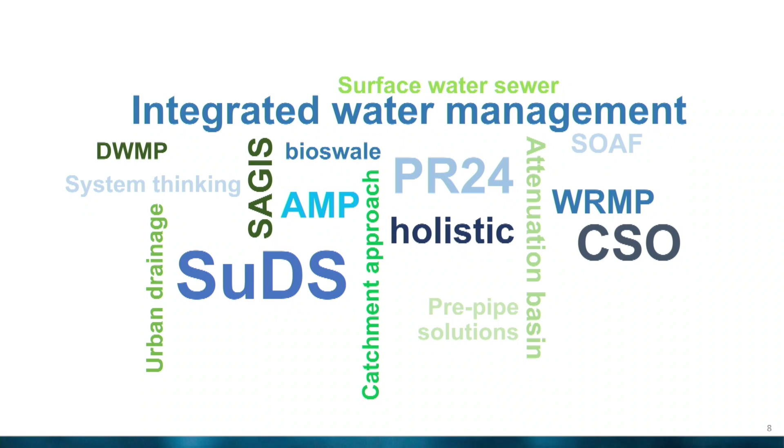So my job is to stir you up and to wind you up. And I'm going to talk to you about 3 problems and 2 ways in which you and all of you can solve these problems. First problem is our climate is changing rapidly. The second problem is we're trying to tackle that problem by looking in the wrong places for the solutions. And the third problem is no one's got a clue what we're talking about.

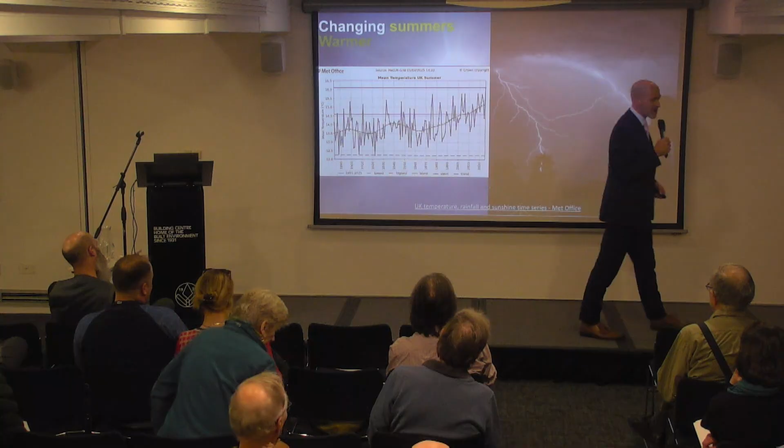Let's get into the detail. Temperature on the left, rainfall on the right. Our temperature is getting warmer, and the consequence of warmer temperatures is more water overall. This is our summer metric for increase in temperature.

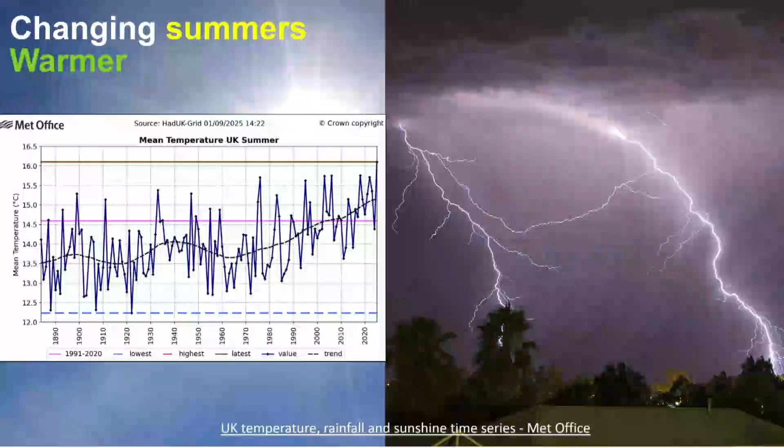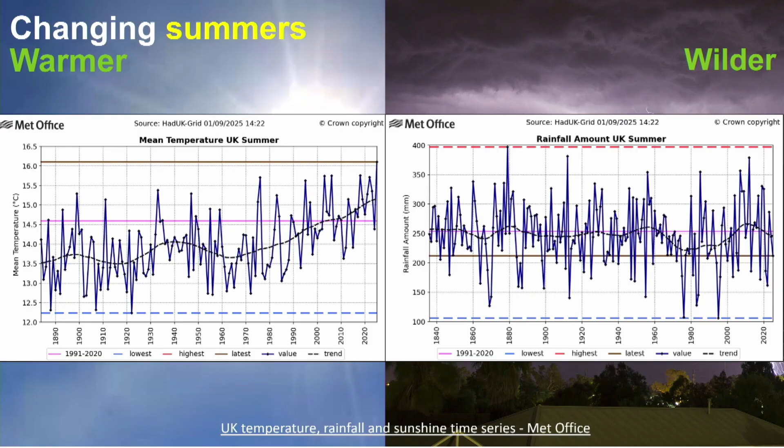Now in the summer, we're not seeing in total more rainfall. What we're seeing is wilder rainfall. Actual levels of rainfall, if measured over the whole of the summer, hide the big thunderstorms that are causing the numbers in there. So we're getting warmer and wilder summers.

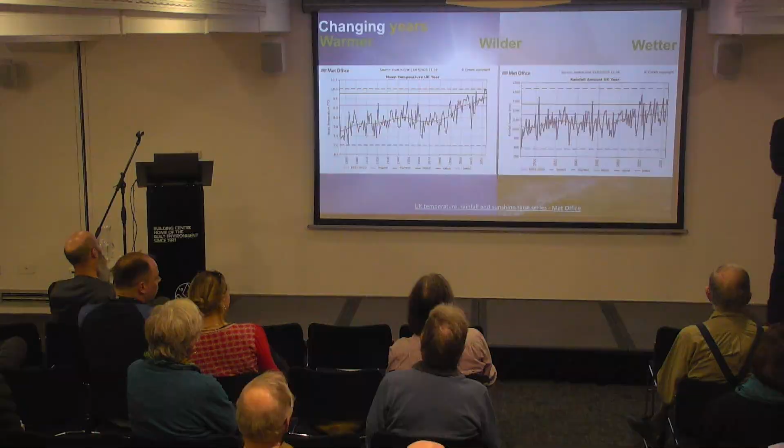If you look at the winters, they're warmer and wetter. And if you take those summer, spring, winter and autumn numbers together and look at the whole year, you're getting warmer years and more rainfall. This is called the Clausius-Clapeyron relationship, a very simple law of thermodynamics: the warmer the atmosphere, the more moisture it holds. That is exactly what we are seeing.

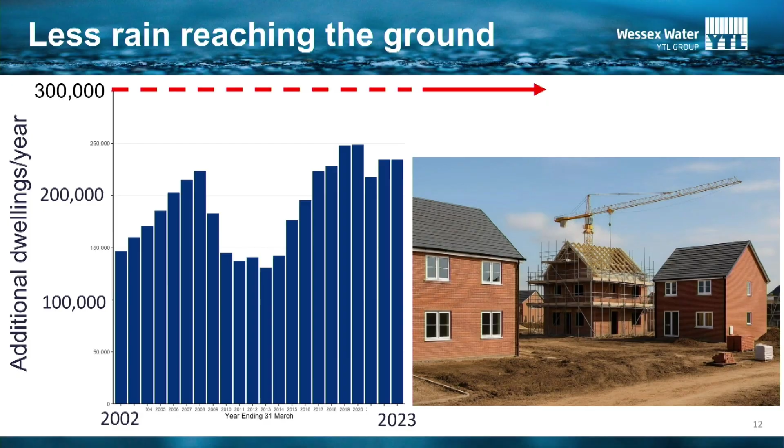We're adding to the problem because when we build properties, we build in impermeable area. Who wants to live in a house with a permeable roof? No one. Historically we've been building at about that rate, and going forwards we've got to build at a faster rate to meet 1.5 million new homes. Anyone want to bet if we're going to get there? No, we're not. But less rain reaching the ground is going to exacerbate the problems.

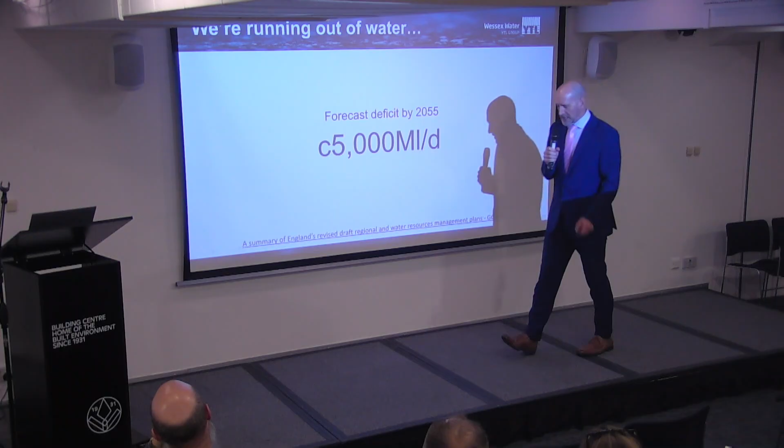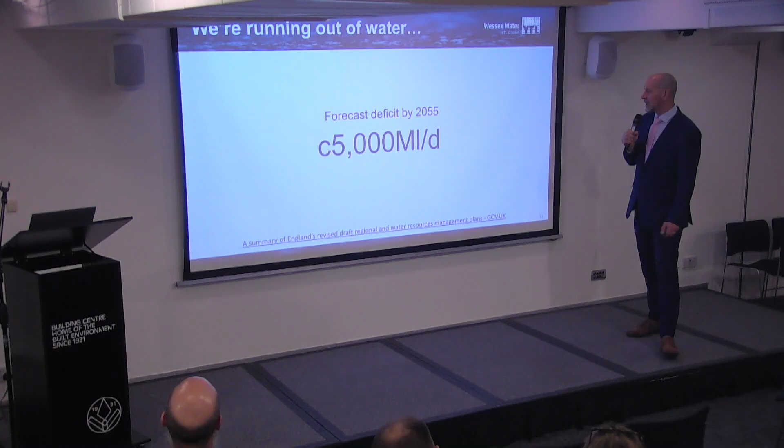Here's the weird thing: we're running out of water, apparently. According to our water resources management planning, by 2055 we'll be about 5,000 megalitres a day short. How much do we currently put into water supply? About 12,500 megalitres a day. Why is it short? Well, we're getting these longer, drier summers, abstraction licenses are being cut to protect the environment, and demand is going up.

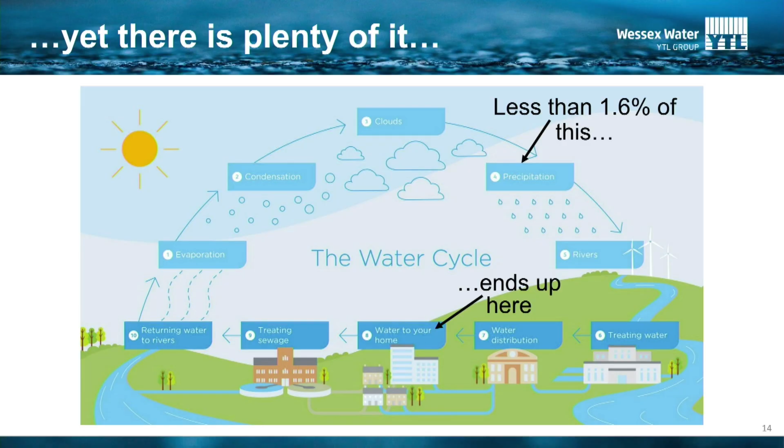So that's a bit weird, because the UK is actually quite wet overall. We give our customers about 1.6% of the rain that lands on our country. So we're running out of water, yet we're only using a tiny, tiny fraction of it. There's something not right here.

I'm going to tell you some really crazy stats now. You've probably never heard of a teralitre. A teralitre is 1 trillion litres, that's 1 trillion kilograms, that is 1 cubic kilometre of water. Try and get your head around a cubic kilometre of water. In 2024-2025, water companies provided 4.6 cubic kilometres of water to their customers.

That's a lot of water. But that water hasn't just rolled to the customers, it's been pumped to them, to the extent where we have had to pump it, on average, 100 metres in the air to get to our customers. Now, 100 metres times 1 trillion kilograms, you're not going to be able to get your head around what that number means, so I'm going to bring it back down to you as an individual. Every day, the amount of energy we have to put into getting water to your tap is the equivalent of you lifting a bag of sugar, 1 kilogram weight, twice the height of Mount Everest.

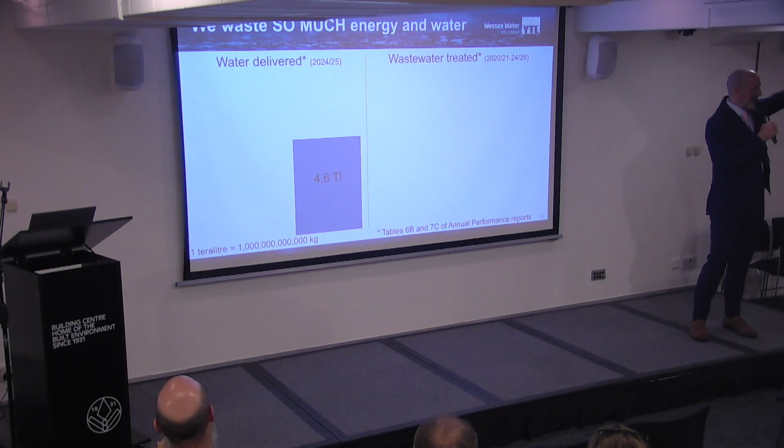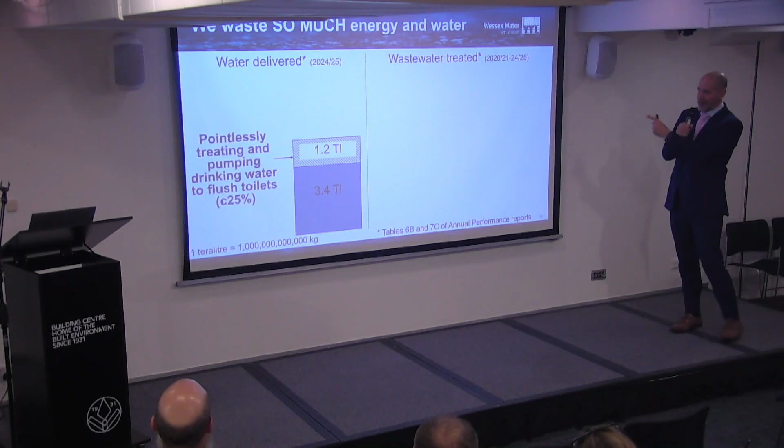That is how much energy your water company puts in for every single person every single day, getting 1 kilogram 18,000 metres in the air, so that you can spend a quarter of it filling your toilet cistern. That is totally stupid, and it's not your fault, that is the way your house is built. And if you think that's crazy, 1.2 cubic kilometres of drinking water is lifted 100 metres in the air so you can flush your poo with it. If you think that is crazy, it gets worse.

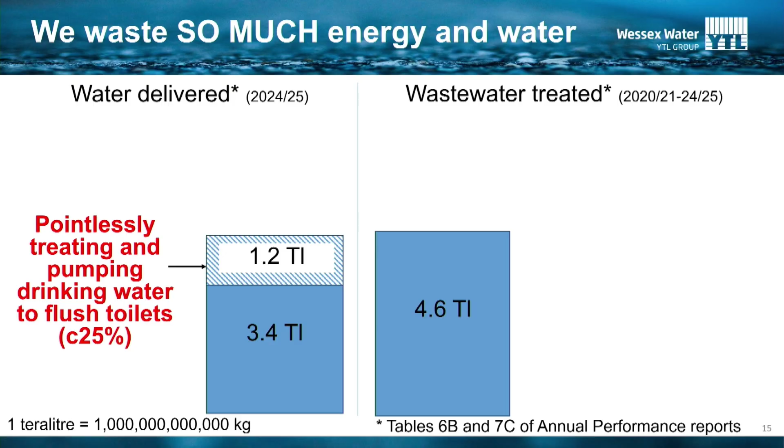That total 4.6 teralitres of water comes back to us for treatment because you guys have polluted it. But that's not all that comes back to us, because you're adding rain, thanks very much. So our wastewater treatment works are treating between 50 and 80% more liquid than we are giving our customers. And we know, actually, what is given to us is a lot more than that. Hence we have the problem with storm overflows.

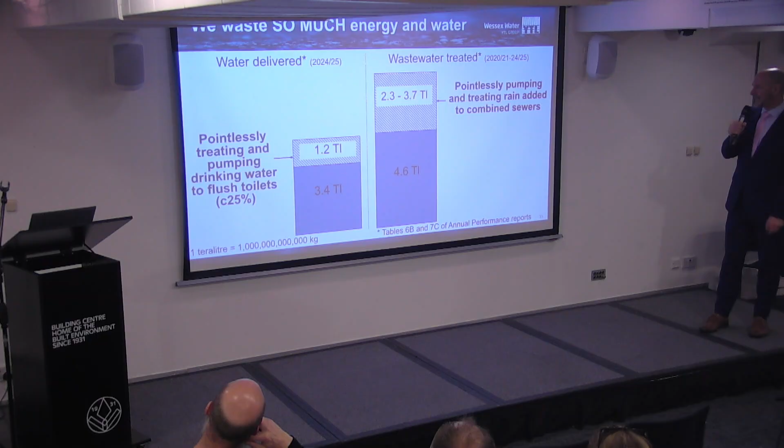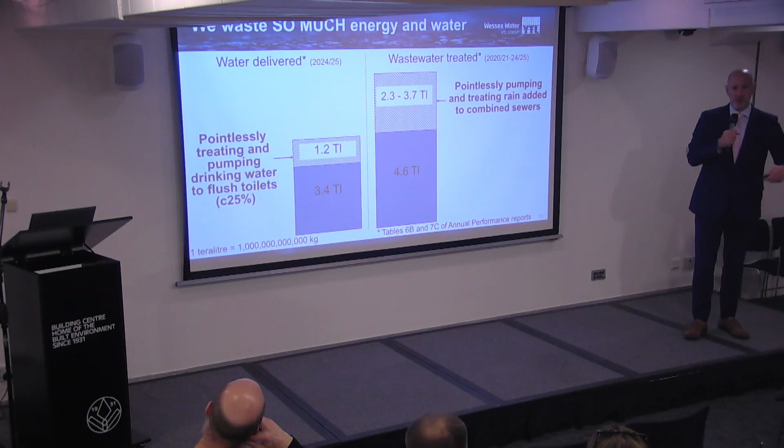Well, that's needless, that's pointless. And the energy that has to go into that is colossal, because not only do we have to lift sewage multiple times, but also we have to treat it, and that requires energy and chemicals. A lot of our chemicals are driven by volume, so if it's a coagulant like ferric sulfate, the more liquid that arrives, because we are treating all this rain, the more chemicals we have to pour in.

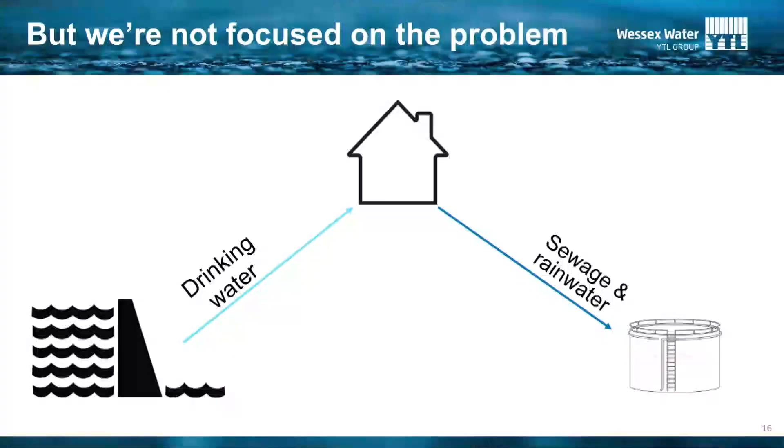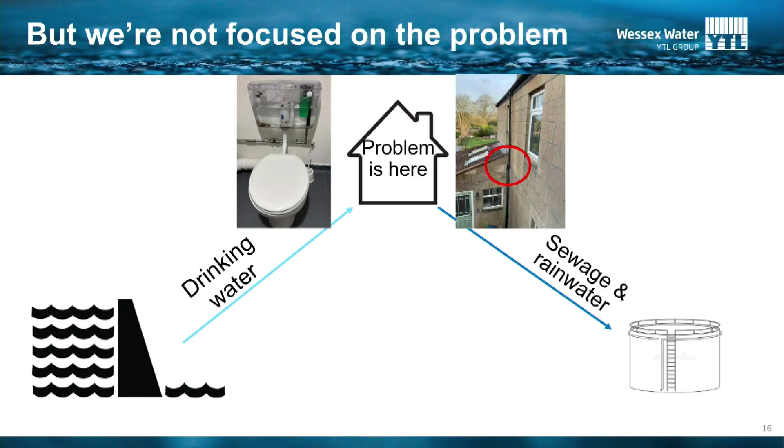We're not focused on the problem, because the problem is here: our homes. We are in the Building Centre. This is what we talk about - we talk about homes. The problem is we're filling toilets with drinking water, and our toilets are connected to our downpipes. About half of the properties in England are built like this.

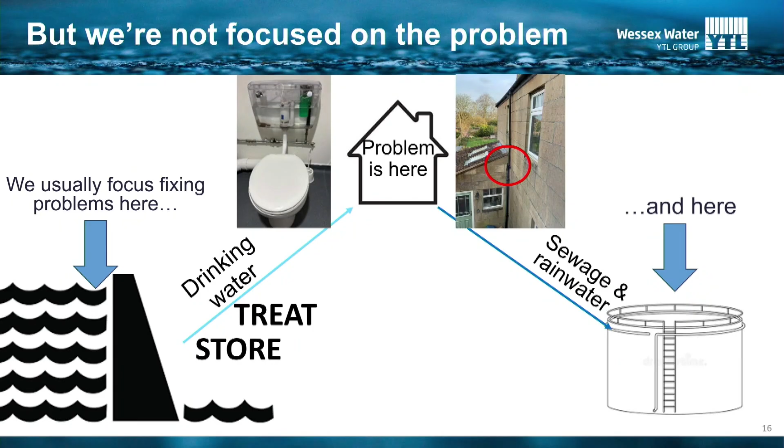How do we tackle this problem? We try and fix it by building bigger reservoirs and bigger storage tanks for stormwater. All that means is we end up storing, treating, and pumping more drinking water so we can fill our toilet systems, and then storing, pumping, and treating more rainwater so we can discharge it back to the environment because it's been contaminated with sewage.

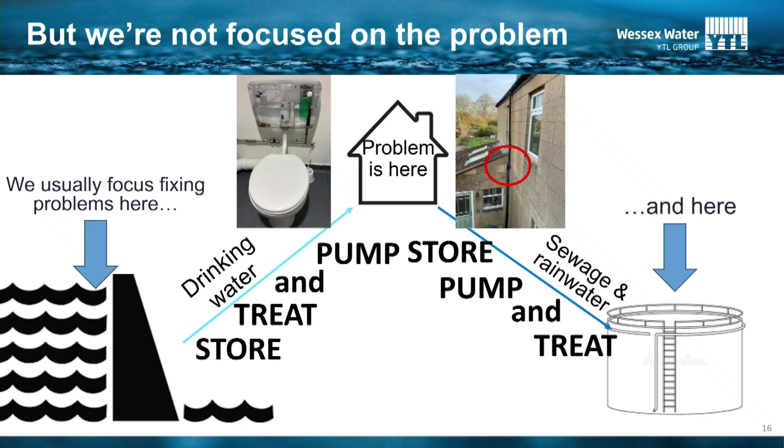We're not focused on the problem. We're stuck in this doom loop of a rapidly changing climate where we're adding more impermeable areas, and the centralized solutions we're building have a very high carbon footprint, which is leading to a rapidly changing climate.

This is miserable, isn't it? I'm sorry to depress you. There will be good news, don't worry.

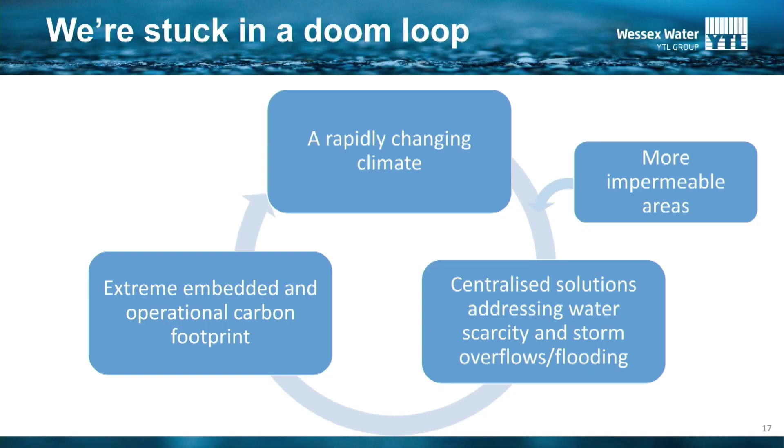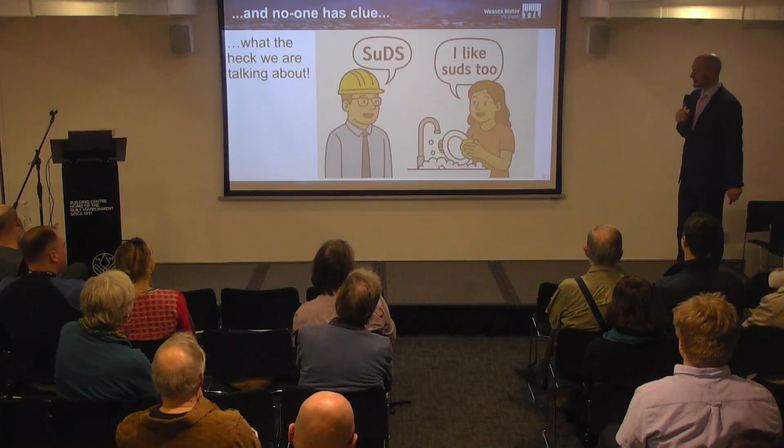My third point was, no one's got a clue what we're talking about. The number of times I speak to people about what I do, and I use water company industry terminology, and they look through you because they don't know what you're talking about.

How do we tackle all three of these issues - a changing climate, people that don't know what we're talking about, and a lack of focus?

Well, here it is, 6 words. This is the peak of my talk, okay? These next 6 words are the peak, because this is what I want you to go home with. How do we do it? It's very, very simple, overly simple, but it's this.

We need to manage rain better where it lands. Right, let's talk about that.

What does that mean? Managing rain better where it lands is basically about following simple source control principles. We all understand what source control principles are, and they are very simple.

Rain's a resource, no whatever Sherlock. We should be capturing it locally and using it where possible - not reusing it, because no one's used it first. We talk about rainwater reuse - no, it's rainwater use, because it's not being used in the first place. And then we should be returning it back to the environment as close as possible to where it landed.

Sounds obvious, and we're going to talk about SuDS in a second. Sometimes we get that wrong.

Let's apply this to what drives me mad, which is storm overflows, and we can solve storm overflows in 4 different areas. I'm going to show you how we currently solve storm overflows and how we could solve them, going from bad to better.

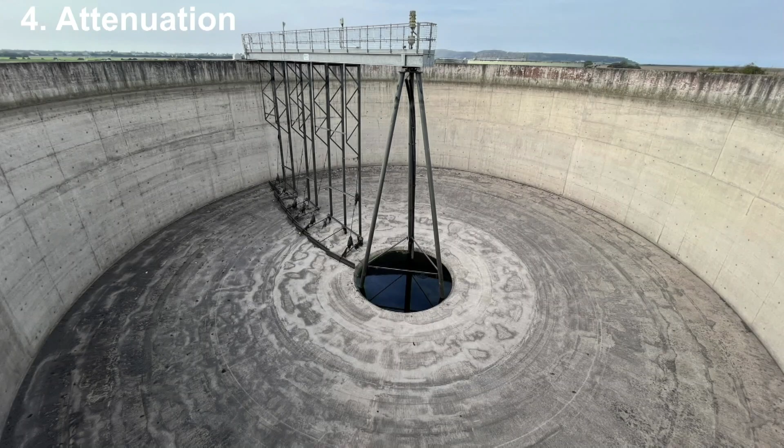We're going to start with number 4, attenuation. Attenuation has high embodied carbon, high operational carbon, because of all the pumping and extra chemicals. Often there isn't space to build this kind of stuff in cities. No biodiversity benefits, it doesn't help with our water resources, and customers' bills go up. Not a great solution, but it's what we're doing.

Increasing flow to full treatment - this is our largest works at Wessex Water, Avonmouth. Currently treats 3.5 tonnes a second. If we were just treating sewage, we'd be treating 1.3 tonnes a second, because there's only 850,000 people upstream of here. But we're treating 3.5.

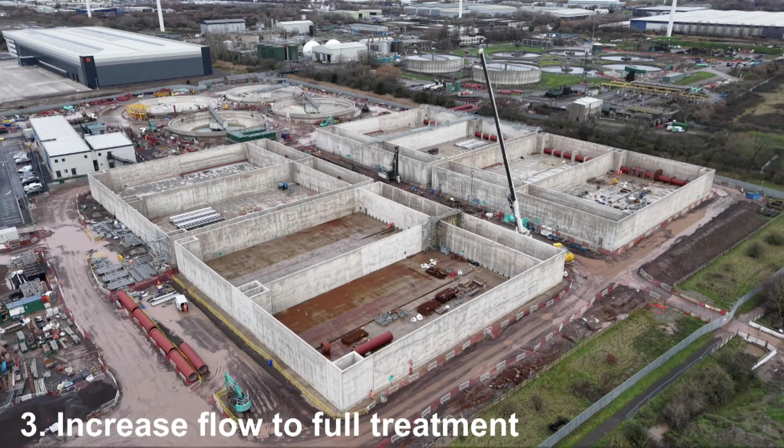That's not enough - we're adding an extra 2 tons a second. This will enable us to treat 5.5 tons a second. If that was sewage, Bristol would be the same size as London. It's not - why? We're treating more rain. How stupid is that? So that's not a good solution either. Lots of concrete, lots of chemicals, lots of energy, no value-added benefits.

Storm overflows, intermittent discharges - well, how about treating the discharges? If you're worried about public health, you can go and zap those bacteria. Lots of energy, no environmental benefit. That is one option, not a great option - lots of carbon, lots of energy, and it doesn't really tackle the whole environmental problem, if you think there is one.

Reed beds, constructed wetlands, etc., are great, especially where the overflow is incredibly dilute, as it is in groundwater, high groundwater table areas like a lot of Wessex. This is one of our treatment works called Wheeldon.

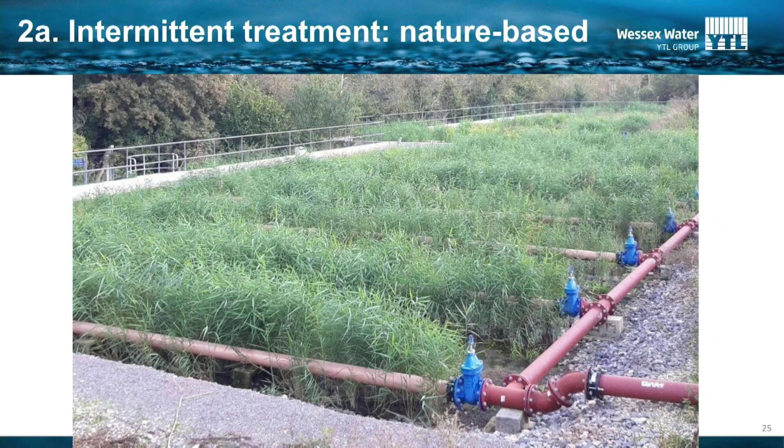In 2023, it discharged for 70% of the year, and what was coming out was cleaner than the treated sewage was required to be. That's how dilute it is.

But there's a big problem with SuDS, and it's a big problem everyone is now talking about: ownership, operation, maintenance. There are 2 consultations out at the moment from both DEFRA and MHCLG about how we tackle the whole problem of maintenance of SuDS and who maintains them.

But what this is lacking is the fact that rain is first and foremost a resource. And whilst it is being used for the biodiversity benefits, the people contributing to it are not benefiting from that resource side of rain. So I want to come to property level SuDS, where we see the rain that lands on our roof

as a resource that we can reuse. Now, that might only be garden reuse because internal plumbing is pretty expensive, but you could easily do that for new build, and then getting rid of the surplus into your gardens.

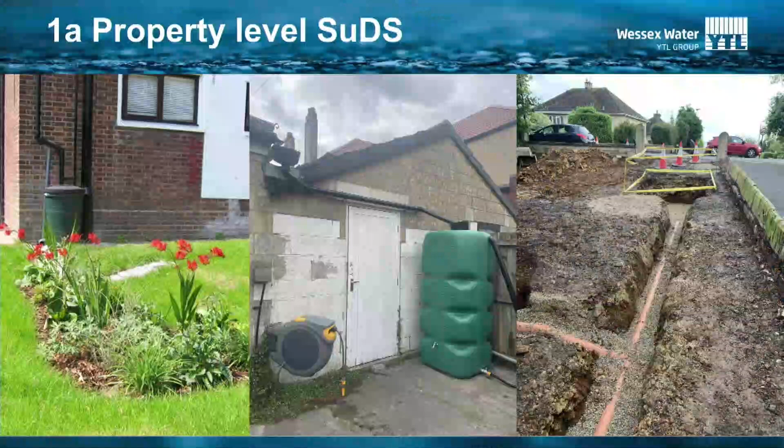The 2 right-hand pictures are my home. Yes, it's a bit of a mess, sorry, this is work in progress. There's a cubic meter capture there. And what's really important with a water butt is what happens when it is full. You can see here the overflow to my water butt, which just goes around the garden.

There's nothing underground, it literally goes into my petunias. The front of the house, I've just redone the driveway and put it straight into a soakaway, so there's no sudsy kind of biodiversity or other benefits from that, but at least it's not going into the combined sewer that runs around the back of my house anymore.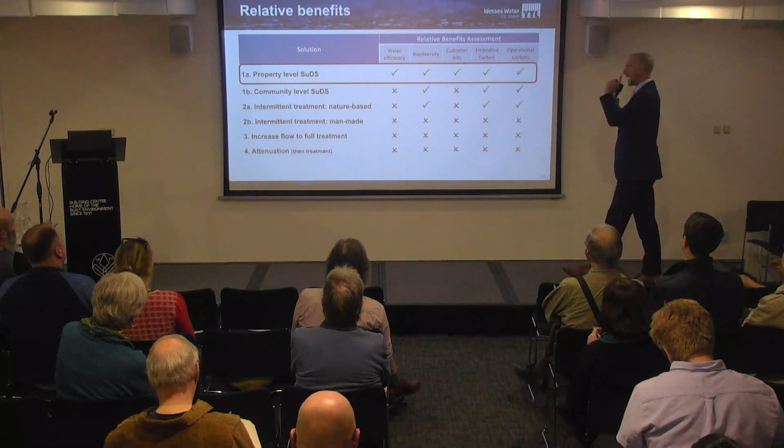So when you compare these options, property level SuDS stand head and shoulders above others. Communal level SuDS and nature-based treatment solutions are good, but they're not at the top of the tree.

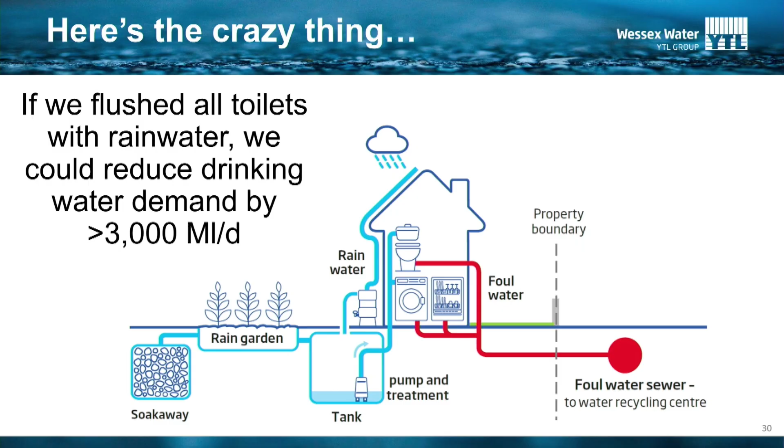Here's a crazy thing. If we flushed all of our toilets in the whole of the nation with rainwater, we could reduce drinking water consumption by about 3,000 megalitres a day. Compare that to the 5,000 megalitres a day that we reckon we're going to be short of. Now, obviously, retrofitting every property like that is a tall order, but let's start with things that aren't built yet.

I'm going to finish with 2 things that we can all do. These are really simple things, and I'd like you all to try and commit to do these. One, let's use a common narrative. It's a narrative that is catching. Other people are saying it.

If we all say it, as people who are involved in water management, managing rain better where it lands, or managing rain better where it falls, it's kind of the same thing, we will make progress. We are making progress.

This is the Water Minister a month ago talking about it. After this meeting, I'm going to the City Water debate. The chair of the EA, Alan Lovell, phoned up my chief exec, Ruth Jarratt, 2 days ago, and he said, I've been listening to this Matt Wheeldon guy, I want to talk tonight about rainwater management.

Ruth Jarratt, my chief exec, said, no, I'm talking about rainwater management tonight. I said, why don't both of you talk about rainwater management tonight? So it's getting through, it's a message that's getting through to the top now.

What do we mean by rainwater management? We mean recognizing it's a resource and then getting rid of the surplus locally. So that's the first thing, common narrative.

The second thing I'm going to leave you with is campaigning for source control principles. These are the 2 principles we've already mentioned. So what are these? What could we do? Well, here's a long list.

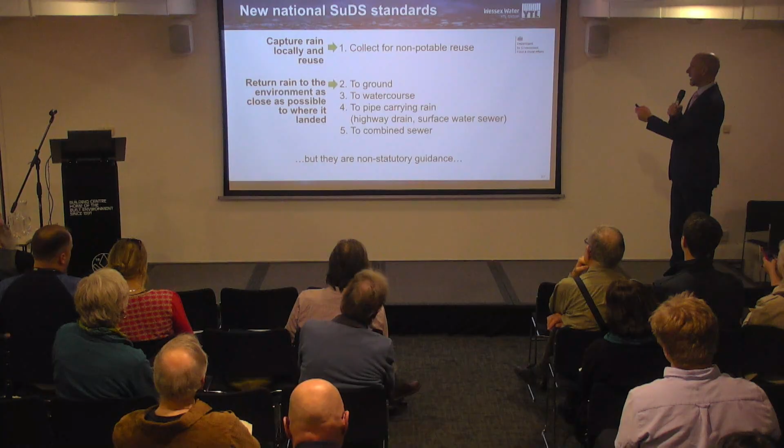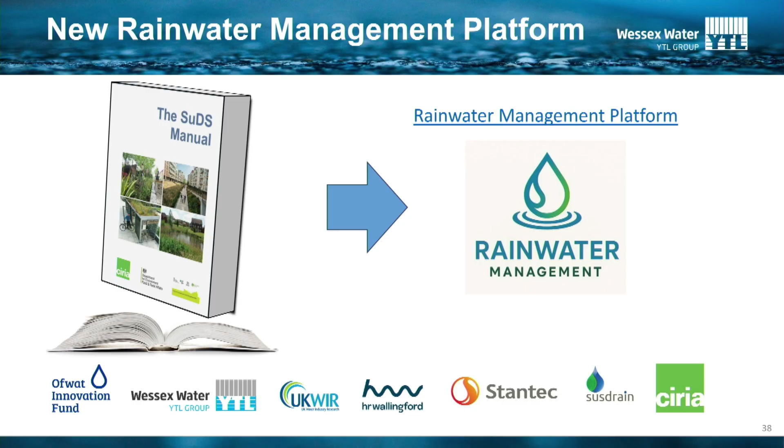Rainwater Management Platform - I'm speaking more about this next Tuesday, but very briefly, it's taking the Bible of drainage and converting it into something modern, new, free to access, and also emphasizing the need to use rain as a resource. That's work we're doing with a whole number of organizations. It's a £2 million Ofwat innovation-funded project. It's very exciting, and I'm leading that as a lead sponsor, so that's really great.

This is very exciting as well. So here's the big exam question: what is the evidence that managing rain better where it lands, for both new and retrofitting development, is better economically for society and the environment than centralized solutions? Lots of work has been done in this space under Enabling Water Smart Communities and various other projects. This is trying to bring it all together into a really simple message that gives DEFRA and MHCLG the evidence they need to focus on decentralized solutions and make it happen.

And then something coming up in October - we're gathering the world's greats in rainwater management, and hopefully the UK can go and learn some lessons from people who are well ahead of us on their journey of their relationship with rain.

Right, my last slide I always leave to Janet and John because this is such a simple message. So Janet and John summarize everything I say, really, really simple. Here's Janet and John on rainwater management: 'My goodness me, John, we've sorted water scarcity and storm overflows and reduced our carbon footprint.' 'Ah, Janet, that's because you and me have become so much better at managing rain where it lands.' Thank you very much.

Is it possible to switch the front lights off? Why not? It's nicer images.

I'm Kevin Barton, Managing Director of Robert Bray Associates. We're a firm of landscape architects that have been specialising in managing rain in the landscapes we design the other way, since the mid-90s, since the whole SuDS thing came across from the US.

We're in a bit of a desperate state. This has been around since the mid-90s, but arguably we've gone backwards quite a long way from when the idea came to the UK. I'm going to show a few examples of bad SuDS, some of the sort of stuff that Matt showed, and then I'm going to do a couple of case studies of housing schemes that use a more integrated, water-sensitive, spongy approach to managing rainwater in development.

It requires a really fundamental mind shift, and we don't like what we call the D word. As Matt said, it's not great to talk to the public and include the word drainage - it puts people off, it puts other disciplines off. I remember in the mid-90s, I was really put off with the idea of sustainable urban drainage systems - it had the D word in it. Why would I, as a creative landscape architect, be interested in drainage?

Little did I know, years later, I would be doing that in every project I work on. So it's important we don't think of it as drainage. It requires a massive mind shift - we think of it as a disruptive technology. This newer way of managing rainwater, as opposed to how the Victorians did it, is a disruptive technology. It's so totally different from conventional drainage that we should discard the D word and really emphasize that you need to take the top of your head off, turn your brain around, and plug it back in again to be able to design in these ways.

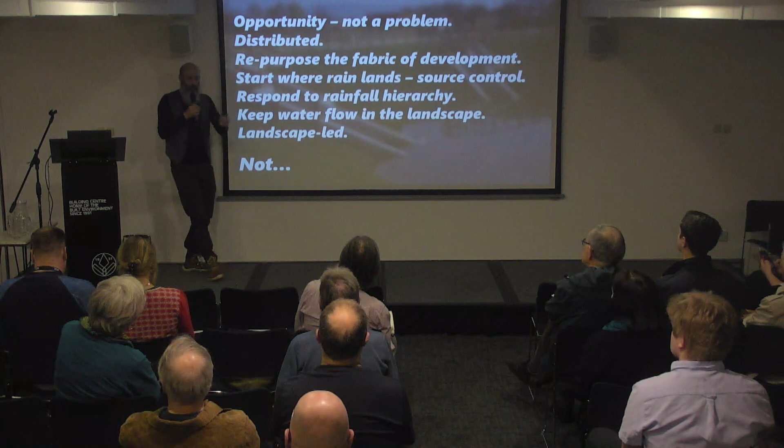We need to distribute its management throughout the development, not the end of pipe, the hole at the bottom of the site, which I'm going to show you a few examples of. We need to distribute that management of water at property level, throughout the landscape, throughout the development - not creating new space for management of rainwater, but using the fabric of development we were going to put in anyway: hard surfaces, roofs, green spaces. We can make them manage water just by tweaking a few materials and the format of them.

Starting where rain lands - really fundamental, this idea of source control. Ideally, where rain lands, or as close to where it lands, we start managing it through things like permeable surfaces, rainwater harvesting, green infrastructure or blue-green infrastructure. And then really important in terms of unlocking genuinely multifunctional landscapes and places for people and water and wildlife is to understand the rainfall hierarchy.

All of these big holes I'm going to show you in a minute, they're sat there - it doesn't feel like it, but in the UK most of the time it's not raining. All of those SuDS systems are just waiting to be functional. These pipe-to-pond solutions aren't doing anything the vast majority of the time. And when it does rain, the vast majority of rainfall events are actually quite small - they're not the 1-in-100 climate change event, 85 mil as it would be in London, well 120-odd mil, but 85 mil of storage. They're nowhere near that. So even when it does rain, most of the time they just fill up a little bit with water, making them muddy and unusable.

So we need to respond to the difference between: most of the time it's not raining, most of the time when it does rain there's small rainfall events, and occasionally we have these extreme rainfall events. We need to manage those different conditions differently through our SuDS management train, keeping that water flowing in the landscape as much as possible.

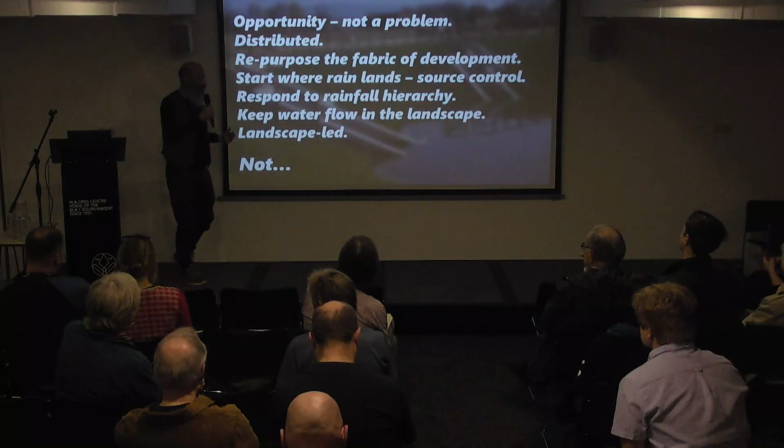Then we can use it as a resource. We can naturally irrigate our landscape. We can create better places for people, cooler environments to help us literally survive the kind of hot summers we're getting, which kill thousands of people a year. So keep that water flow in the landscape. We can create biodiversity features as well, and then use a landscape-led approach. Not...

This, sadly, is still 95+% of what's going through planning. Hopefully the new national standards that came out last year give a little more teeth to the planning system to demand more, but it requires people understanding how to ask for better. This is still the prevalent approach, what we call the end-of-pipe approach: collect everything conventionally, modify conventional drainage to meet these new requirements of storing water, focusing on just this extreme rainfall event, creating dangerous features within public landscapes.

Now it's just totally overgrown and forgotten about. This is not acceptable. The idea of putting a knee rail around a green space in development land is really, really valuable. We shouldn't be sterilizing it just for this one functionality, managing extreme rainfall events if they happen to come along.

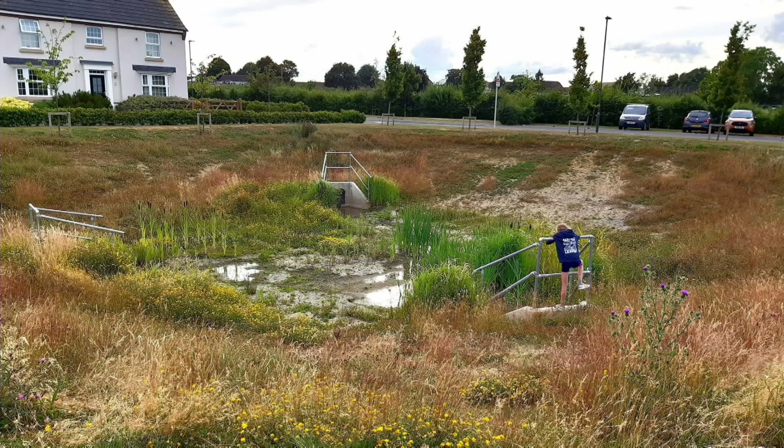There's a bit of wildlife opportunity here, but this is conventional pipe drainage, so all the pollutants are coming in here, so it's actually not that great for wildlife because we've got hydrocarbons, heavy metals, toxic microplastics in there.

And to cap it off, we've got so many pictures of kids climbing these things. The last thing you should do—well, A, you shouldn't do big concrete head walls like this. Anyway, the last thing you should do is take a sort of 1 meter high concrete head wall, add another 1.2 meters to it with basically a climbing frame of horizontal bars, and then think that's acceptable to put in a public open space in the heart of a housing area. I've seen so many kids playing on these. It's a couple of meters down to hard concrete. It's just not acceptable.

Just dressing it up as BNG is not the answer either, and I think we're going to see more of that as the pressure of BNG unfolds.

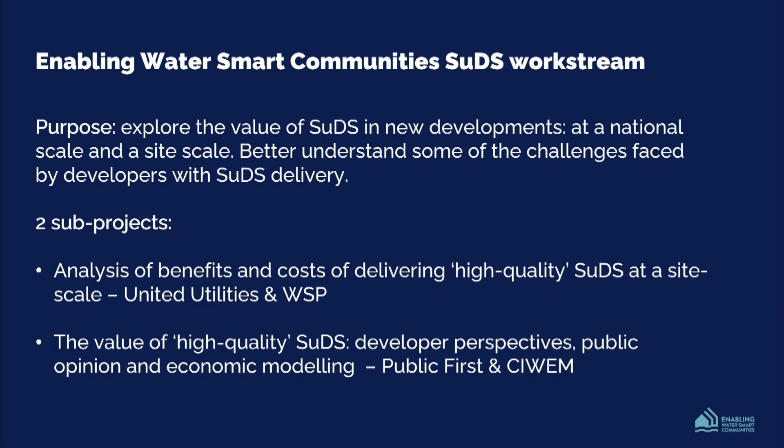But there's also another piece of work that was done by Public First, who really looked at the public perceptions and the wider UK benefits of high quality SuDS. Alastair, who's here today, will be talking to you later about that one. But I'll go on to talk to you about the cost benefit analysis.

So, high quality sustainable drainage systems - we've been in a position where we've had SuDS for a bit, and we've just had presentations today talking to us about the SuDS that's come out on development sites. I'm here to talk to you about analysis that's been done to support new developments and what the outcomes are from that.

So first and foremost, we had to go about with what are high quality SuDS, and what do we mean by low quality SuDS? Well, the focus of the work is obviously looking at the high quality SuDS because we want it to be better, don't we?

We don't want the bomb craters and the kiddie climbing frames that aren't particularly health and safety conscious. So we want the high quality SuDS, the integrated SuDS. But we had to define it first with our technical steering group. We also had to define what we meant by low quality SuDS. If we think about the 4 pillars in the CIRIA SuDS manual - water quality, hydrological benefit, biodiversity, amenity - does it actually tick those 4 pillars?

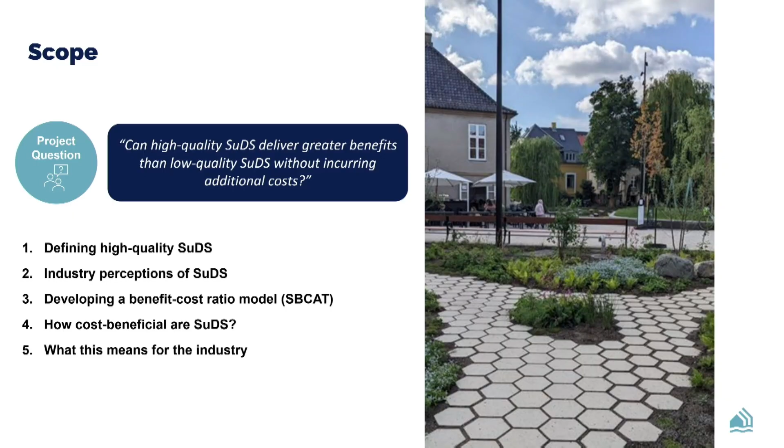It's the high quality SuDS that we're looking at to tick those 4 boxes. Low quality usually just focuses on, as the previous presenters have touched on, end of pipe solutions - very simple designs, mono asset design, very limited in terms of the actual wider benefits. There's no real effort to capture wider benefits as we've seen from those others.

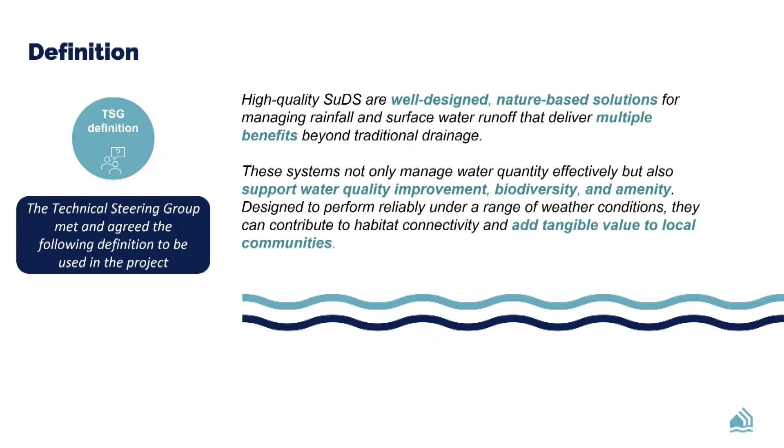So I'm going to talk you through a bit of the methodology and how we built this SuDS benefit cost assessment tool, what went into that and what we were considering. So we came up with the definition of high quality SuDS, which was agreed with the technical steering group, to meet the requirements of all 4 pillars of the CIRIA manual.

The method we went through - nothing surprising here - we did a literature review. A lot of the stuff on industry best practice and SuDS is well documented there. We did industry engagement, taking a view of the literature, going through a review of that, then took it through to industry engagement via a questionnaire approach to really get the understanding from practitioners to sense check that.

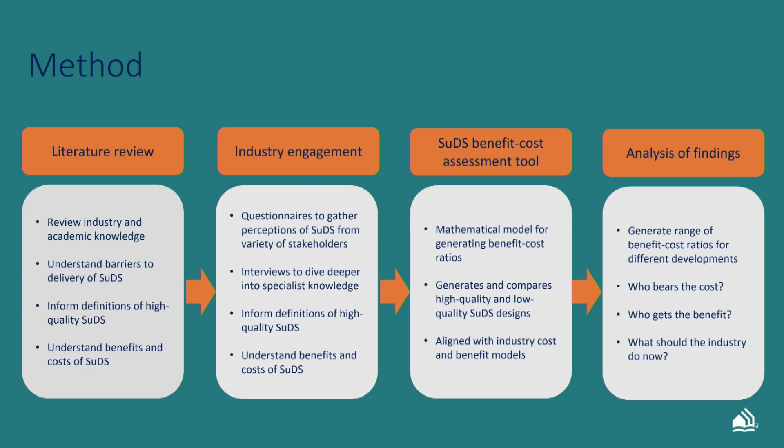And then we built it into a SuDS benefit cost assessment tool, which is a mathematical model for picking up all the costs that were fed in, and also using the CIRIA BeST tool to assess the benefits and getting the two linked to give a relative benefit-cost assessment. And of course, pumping out analysis of findings.

So key findings of the literature review. Well, like I said, we've had SuDS around for a while. There's a lot of stuff around the national standards. There's been recent changes, as we've heard from previous presenters, about the standards that have come in. Of course, they're all still guidance - they're not mandatory.

Elements here: SuDS costs and benefits should be assessed through the whole life cycle. Of course they should. And what is really being done about the upfront assessment and the design of this, including these high quality SuDS considerations early on in the planning cycle.

So the key findings from the questionnaires and interviews were about affordability, the value benefits of space, and design considerations. We went through a series of questionnaires and interviews with a lot of people, breaking it down into specialists - developers who obviously focus on price production, getting the houses out; engineers focused on the design and meeting the standards; landscape architects focused on getting the sense of place.

And what I found working on this particular project was all these dynamic views and how controversial SuDS can be amongst the different groups - debating what is high quality SuDS and low quality SuDS, and the individual pressures that were coming out on design and build.

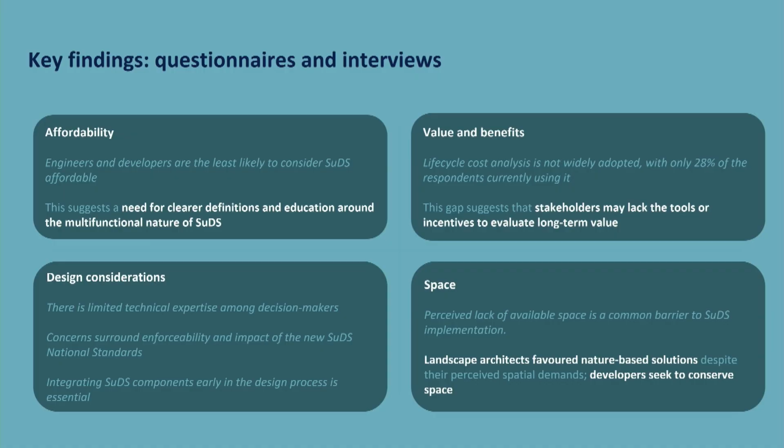There wasn't a reluctance from the people we talked to, design consultants, to engage with high quality SuDS. It's more that they felt they had barriers, whether guidance or understanding, but there's a real desire to move things forward.

We used SuDS Best to assess the benefits. We built this model, which had 600,000 iterations, without going through all the cost benefit and other model run information. We had 180 sites and 600,000 iterations.

We went through a sensitivity testing exercise as well. We tested real outcomes and real sites to make sure the relative cost benefits we were getting out were right and in the right order.

Model findings: the benefits you get from high quality SuDS far outweigh what you get from low quality SuDS. So the high quality SuDS situation gives you far more benefits.

The actual nitty gritty of the costing elements we didn't go into in huge detail, which we need to focus on for relative pricing of particular jobs. But the benefits are so far and large, it just shows how much we really need to look at high quality SuDS and move that forward.

For residential sites, which is what EWS is focused on, there were up to 6 times the benefits. For commercial, we're looking at 13 times the benefits. These sorts of benefits are not something that should be particularly ignored.

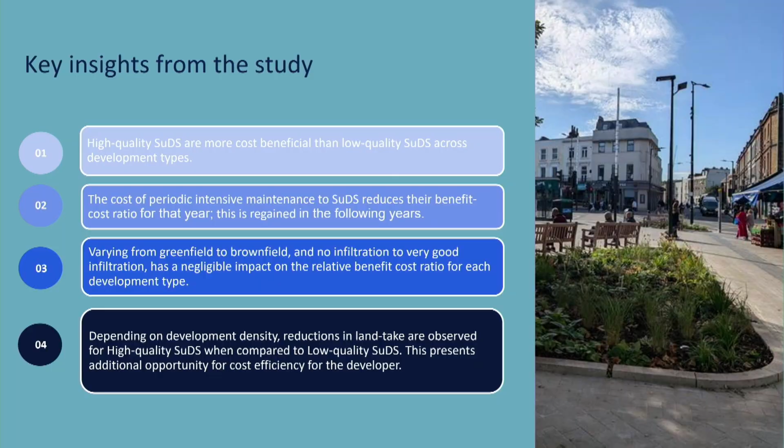One of the things that's always struggled, one element we think about in Enabling Water Smart Communities, is the stewardship of these particular assets. The developers build the houses, put in the ground, then they move on. So what were the benefits for them?

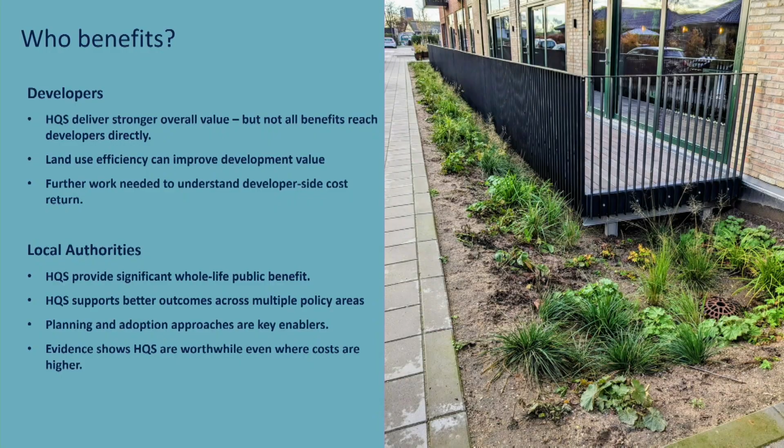The potential benefits need another piece of work to really explore in great detail, but the land take could be of benefit for them to have high quality SuDS. This touches on what Kevin was saying earlier too, that these high benefits are of benefit to the home user, the society, the community, the sense of place, but the developer also gets an incentive because of the land take.

So you've got efficiency there around development value, but we need further work to dig into developer side costings. For local authorities, there are a number of policies touching on biodiversity and climate change, and all of this interacts with high quality SuDS, which can help with this.

I think of it as having all these different checklists to go through, but if we follow a high quality SuDS approach right at the beginning, it would tick a number of these boxes and move things forward. So what next? I thought we touched on a number of things here.

Early in the process, we need better communication. There's communication and knowledge, because within the sector there's a bit of a void on high quality SuDS and what those mean and how we can do that.

When we're talking to communities, they don't recognise the benefit of what it is. If we showed them and explained it, the bomb crater actually having this, or as I call it, a bit of a Center Parcs approach - but I get told off for that - more of a greenery around you on your doorstep, I think they'll find highly attractive, and that'll probably link into what the public were thinking of.

I don't want to say too much and steal Alastair's thunder later.

So for me, my colleagues have previously touched on this as well - consultations are out from DEFRA and MHCLG, and one of them is about land and private estate management. It really does touch on the point of stewardship, and who should be managing this, because if we can get that clearer, that would help us.

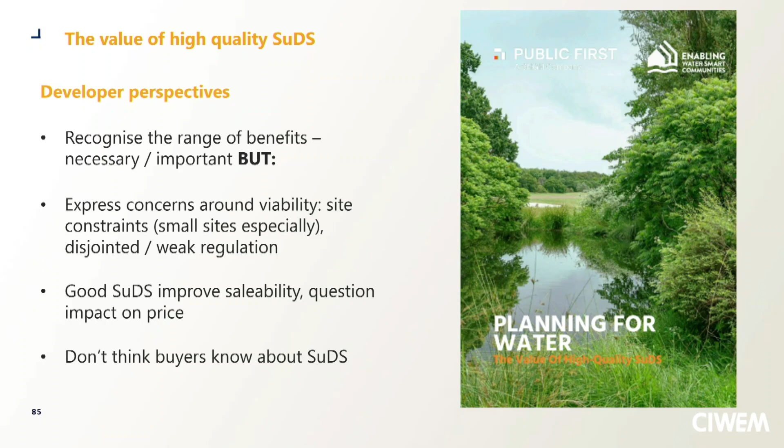After say 15 years or so of experience, they recognise that good SuDS improve saleability. They do question whether that then transfers into value and price impact - we'll touch on that later. They think buyers like SuDS, but they don't think buyers generally, again to Sue's point, really understand it. Most of them don't, a few of them do.

In terms of the economic modelling, what were the headlines? Basically they looked at the benefits that could be achieved by incorporating good quality SuDS in the government's targeted 1.5 million homes, which they refuse to use as a figure - they like to use the OBR's 1.3 million homes. What that showed, after they'd done all the voodoo, was that it would unlock around £247 million per year in benefit, mainly through amenity, a little through rainwater collection, and a little through air quality, to the occupants and residents of those 1.3 million homes. So that's not an inconsiderable amount of money year on year as a benefit.

In terms of how the public values it, well they like all of the things that well-designed multifunctional SuDS deliver. So they like good air quality, green space, amenity, wetlands, good landscaping. They even like permeable paving, apparently, according to this. Most of the individual benefits they rate above 50% in terms of preferring them rather than not preferring them or not caring about them.

Finally, in terms of the actual value of good SuDS to residents, from the polling and the in-depth, immersive research that Public First did - they went and had 70 interviews on 8 different new build housing estates in Cambridgeshire to really dig into the detail - they found from willingness to pay surveys that people would be willing to pay up to £281 per year more in rent increases or service charge uplifts to achieve reduced flood risk, higher water quality and better communal green areas.

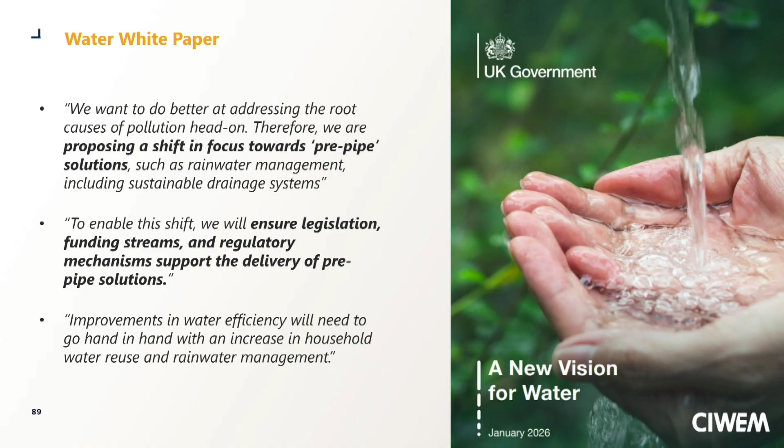What government has said is that it recognises the value of treating all of these challenges we're facing with climate change and pollution and so on far closer to source through pre-pipe pollution solutions, and it is committed to ensuring that the legislative frameworks, the funding streams, the regulatory mechanisms and all that support the delivery of those. That's a really good statement and starting point.

People who have worked in this arena for some time will know that there is a piece of legislation that will make this approach mandatory. It's existed for a long, long time, since 2010. Unfortunately, it just hasn't been commenced.

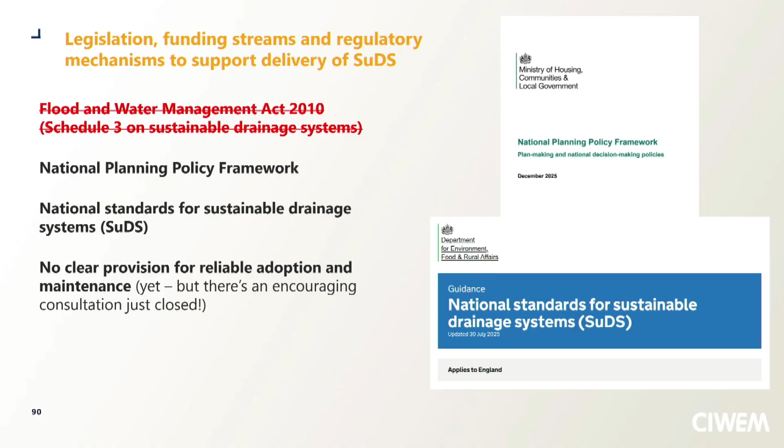The previous government finally, at the beginning of 2023, agreed that it would commence Schedule 3 of the Flood and Water Management Act by the end of 2024. We ended up getting on a little train of successive prime ministers and secretaries of state, and that got delayed. Then we had a general election, and now the current government, who were supportive of bringing this forward, when they got into power, decided to have a little look at the existing system and see if we could tweak that a little bit. And so that is where we are.

We're almost certainly not going to see Schedule 3. We're probably going to have to just deal with an enhanced jigsaw of little planning-led bits. That starts with the National Planning Policy Framework, which has been recently updated and consulted on, and that requires SuDS to be incorporated in all new developments and done in accordance with the new national standards for sustainable drainage, which people have talked about already, so I'm not going to talk about. What isn't there at the moment is a clear mechanism for adoption and maintenance, and adoption and maintenance has been one of the hurdles historically to getting good stuff done and maintained for the long term.

Well, so national standards, you know all about them now. The previous non-statutory standards were awful, 2 pages, ish, now 60 plus pages long, detailed, deal with the full SuDS train, have rainwater harvesting at the start, jolly good, we're all happy, give or take, apart from the pedants of the world.

On adoption and maintenance, still no firm provisions for that, but a really interesting consultation has very recently closed, and it emerged from the Competition and Markets Authority's report on the house building market back in 2024. As a result of that, the Housing Minister really recognised that the current situation with private estate management companies is far from optimal, and the way in which public amenities, including SuDS, are delivered is not good enough. The way in which they're looked after is not good enough, and these companies often charge far too much for basically not doing anything. And probably in terms of the quality of what would be delivered and maintained, that would be likely to be better if it was delivered by a public body.

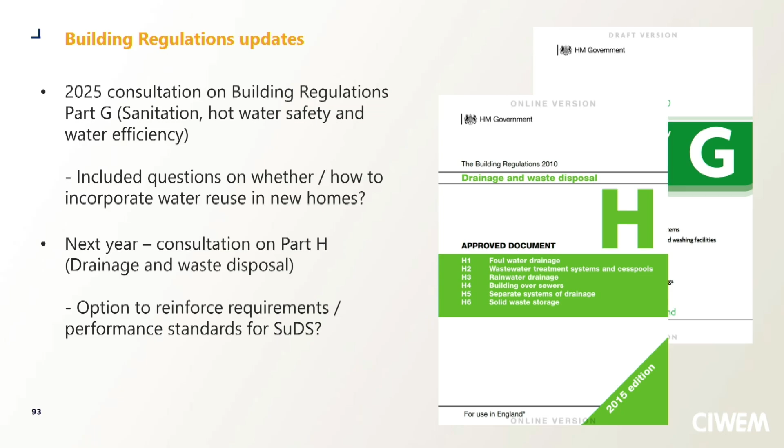So more little regulatory components to ratchet up the pressure there. We basically wanted to look at, within CIWEM, whether it would be possible to essentially secure very similar outcomes to what Schedule 3 of the Flood and Water Management Act could achieve, but through this kind of cobbled together multitude of components under the planning-led approach.

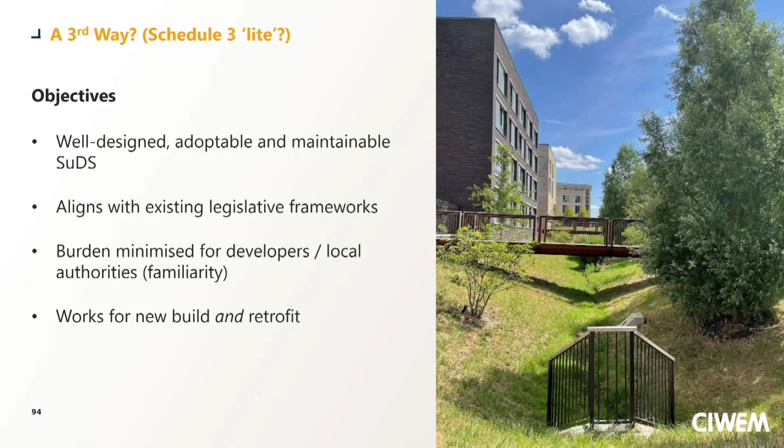Can it achieve well-designed, adoptable and maintainable SuDS? Can we do it in ways that align with existing legislative frameworks so that they will be familiar to developers, familiar to planners, and really reduce the argument that a mandatory approach is really burdensome? And will it work for new build as well as retrofit?

We reckon yes, probably. And really very, very simply, in terms of the mechanisms that could govern SuDS approval and adoption, there is a process which is Section 38 of the Highways Act 1980, which governs highway adoption in new developments if they're going to be adopted by public bodies. And that safeguards the delivery through a financially bonded process and ends with an approval against the design standards, which is the Design Manual for Roads and Bridges, and that's the one.

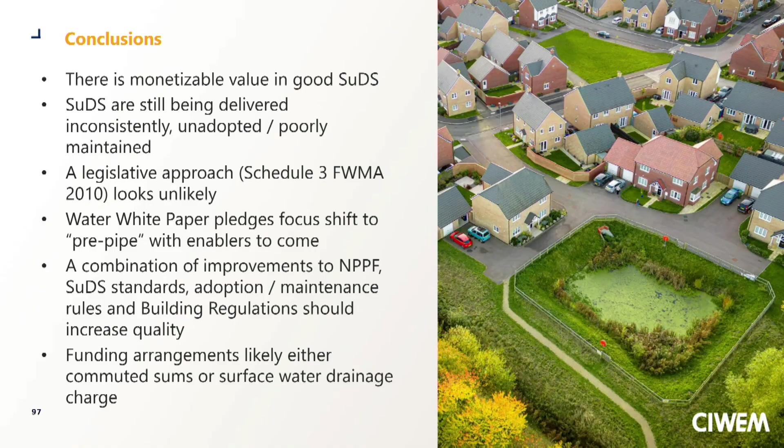We've got a good policy headline in the Water White Paper with the pre-pipe stuff and managing rainwater better. And probably, if the government puts the right level of ambition through all of these consultations that are coming through, a combination of improvements across the planning-led approach could pretty much unlock the same kind of outcomes as can be achieved through Schedule 3. What we really need to unlock now is the funding arrangements for long-term maintenance. Thank you very much.